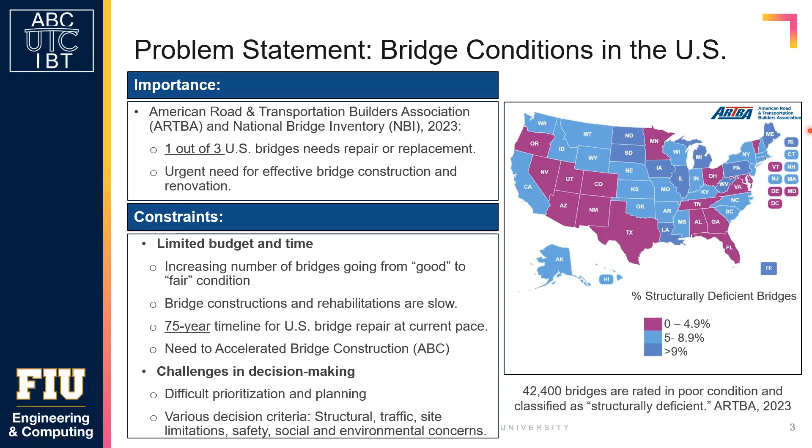So the answer is we really need a decision support tool to help our decision makers overcome these challenges. Otherwise, with this pace and with the budget limitations we have, it takes a lot of time for the country—maybe 75 years—depending on the current number of bridges that need rehabilitation or replacement.

Talking about accelerated bridge construction, we're really talking about multiple aspects. It's not just about reducing the construction time or the project time. It's actually about using innovative planning, design, materials, and construction methods to construct bridges in less time. These are the benefits recognized by the Federal Highway Administration, FHWA—safety, quality, longevity of our projects, and even social and environmental aspects.

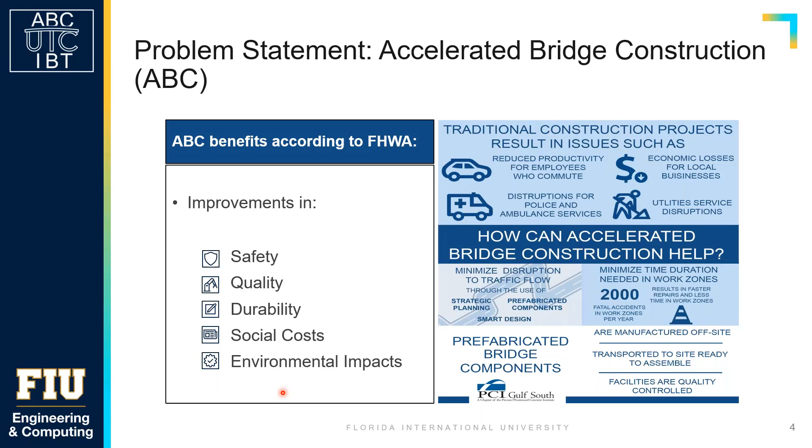And what we are doing is really trying to incorporate as many of these aspects as possible into the decision making for our projects. Currently, state departments of transportation across the country use different approaches for decision making about the suitability of adopting ABC methods in bridge projects.

These approaches vary in a range, from very simple approaches including questionnaires, flowcharts, and simple tools, going all the way to more rigorous and time-consuming methods, including the decision-making software tool by the FHWA that works based on the AHP, or analytical hierarchy process, method.

So different state DOTs have their own procedures. Some are using one-step methods, two-step methods, or three-step methods to come up with a planning method—a decision-making method for identifying the bridges that are appropriate to use with ABC methods.

And here's a link if you want the FHWA tool, which was developed in 2012 through a collaboration with some other state DOTs.

So we did a review of the existing tools, trying to see the benefits, the pros and cons of each tool. We finally ended up going with the Connecticut DOT tool, because Connecticut DOT uses a middle-ground approach—a one-step method, and it's actually a spreadsheet-based tool, an Excel file that decision makers in the state can use to determine the suitability of a project for using accelerated bridge construction methods.

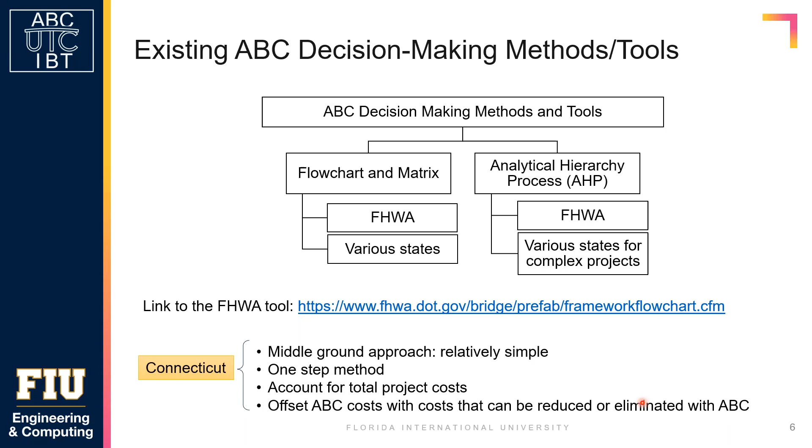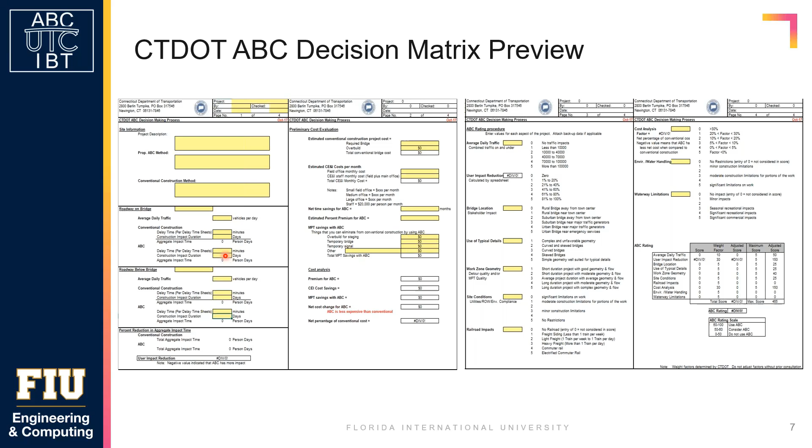This is a quick screenshot of the CTDOT ABC decision matrix. That's again a spreadsheet, an Excel file, and the user needs to provide input values for the highlighted cells, as you see here. And this is basically how this tool works.

So by using the Connecticut DOT tool, we are looking at two alternatives: number one, use ABC; number two, do not use ABC. So we're basically selecting between the ABC and no-ABC options.

Connecticut DOT uses 10 criteria for this decision making. The range of criteria includes cost, with the highest importance or weight factor, traffic conditions, and user impact reduction—that's the time the user or driver spends because of that project. Then there's a wide range of criteria related to the location of the project, the design of the project, site conditions, and environmental factors, including the existence of water work in the project.

CTDOT uses predetermined or fixed weight factors showing the relative importance of these 10 criteria. As you see here, user impact reduction and cost are the most important factors. Finally, the tool calculates a final score for each project, called the final ABC rating score, a number between 0 and 100.

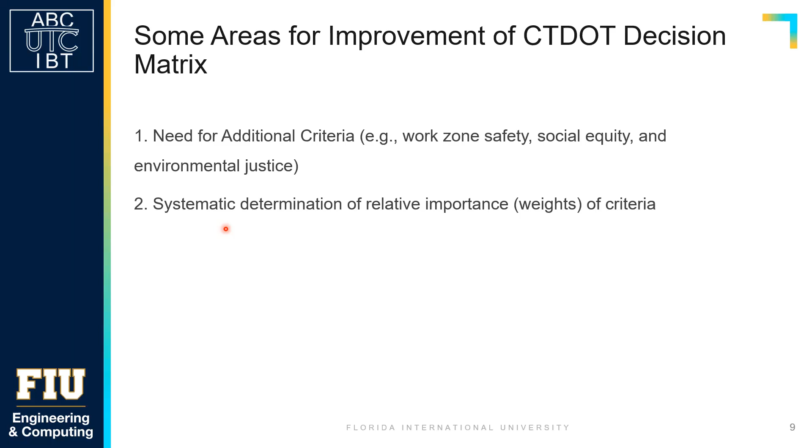So with that, the objectives of this project are basically to incorporate these new aspects into the decision-making tool. We are quantifying ABC benefits for work zone safety and incorporating that into the tool. We are incorporating social equity and environmental justice aspects into the tool, and incorporating a systematic method for determining the relative importance or weights of criteria in the tool.

With these improvements, we're expecting the tool to still be simple, because that's an important factor here. We want the tool to be used by the end users, by state DOTs. The tool is systematic, meaning it's adjustable to different projects.

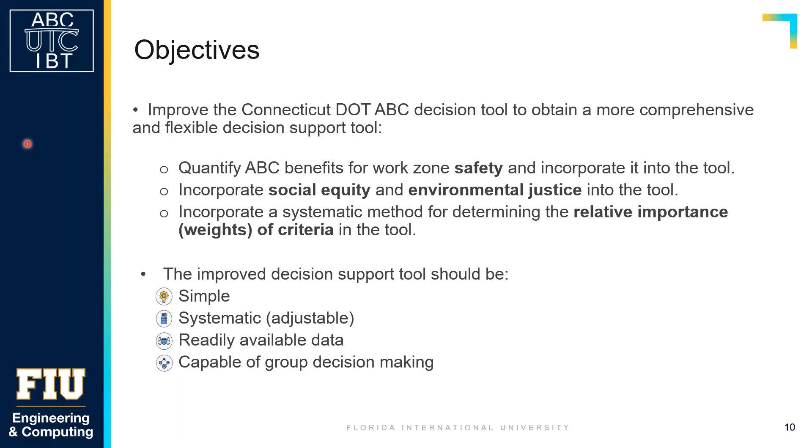Another very important factor is that the tool works based on readily available data, meaning any state DOT in the country should be able to use this tool. And finally, because of having that systematic method for determining weights, the tool is capable of group decision making, which is another important aspect of the new tool.

So let's quickly talk about the relationship between ABC, accelerated bridge construction, and work zone safety, and why safety is important, and why increasing safety is a benefit from ABC. Bridge construction projects are time consuming, and they include a lot of works on the site that affect the construction process and traffic, with a lot of detours and lane closures.

There is data from the National Highway Traffic Safety Administration Fatality Analysis Reporting System that shows work zone fatalities and injuries are really increasing. We see the increasing trend from 2012 to 2021, with a 55% increase, for example, for work zone fatalities.

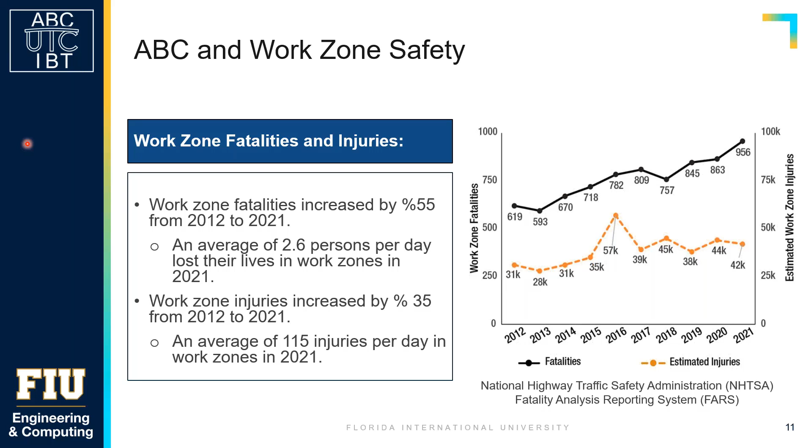And that shows that if we're able to reduce the construction time, it's not just reducing the construction time, it's actually improving safety in the project, or reducing the risk of these fatalities, or risk of having crashes in our work zones.

Now the relationship between ABC and social equity. It might be a question to you how accelerated bridge construction might be related to social equity. To answer that, we first need to understand what social equity means in the context of urban infrastructure planning. The answer is it's providing equal resources and opportunities by infrastructure systems for all urban communities, including ethnic minorities, low-income communities, and sensitive groups including the elderly and the younger generation. So the way ABC can provide benefit here is different.

As an example, you can think about the role of ABC in reducing interruptions in accessing hospitals for communities with sensitive ages, with people with sensitive ages. Sensitive ages are usually defined as people younger than 5 or older than 65. A lot of times these groups need to access hospitals more than other age groups in the community, and by having accelerated bridge construction methods, we are providing less interruption in people's access.

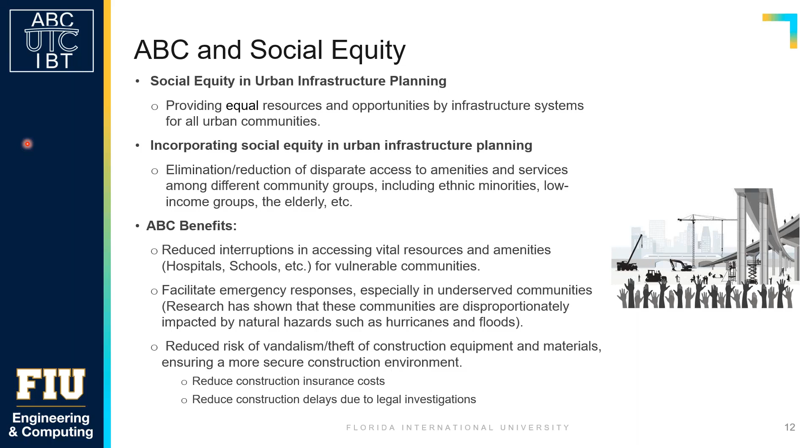There are other benefits of ABC, including reducing the risk of vandalism and theft in construction projects, which can provide reduced construction insurance costs, and also reduce construction delays due to legal investigations.

When we think about environmental justice, we need a definition. In this context, environmental justice means providing fair treatment and involvement of all people regarding environmental policies. For an urban infrastructure project, including bridge construction projects, that's providing the same degree of protection from environmental and health hazards to everyone.

In our specific case, that includes our construction crew and also the people who live close to our work zones. We know that environmental factors such as extreme heat or poor air quality are threats to human health, to our workers, and to our urban communities adjacent to the project. So by reducing construction time, we are actually improving these aspects of environmental justice.

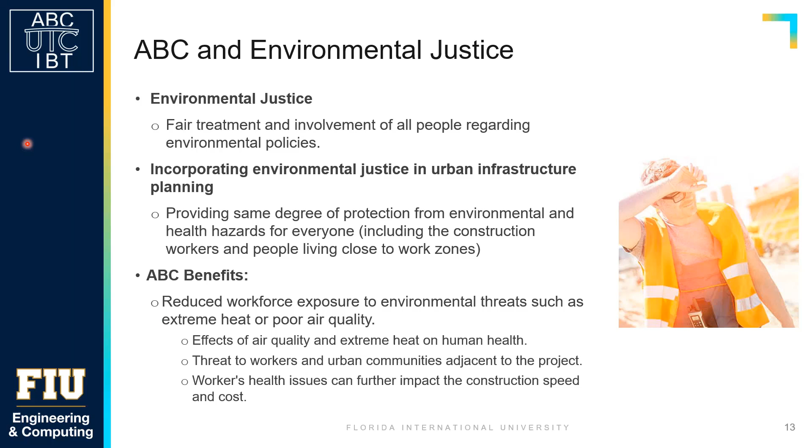Recently, we conducted a project under the ABC UTC, and this is a recently published paper. We tried to develop a framework for incorporating social equity and environmental justice into bridge construction planning and prioritization. That's a very comprehensive work. For social factors in that project, we looked at 6 different data sets, including income, population densities, average commute time, and stuff like that, as you see on this screen.

But in this project, this new tool is actually building on that recent study for social equity and environmental justice. However, we understand that this new tool should be simple and practical, so we didn't use all 6 factors for social equity and the 2 factors for environmental justice. We only use 2 here: income and population density. We'll be talking about that shortly in this presentation.

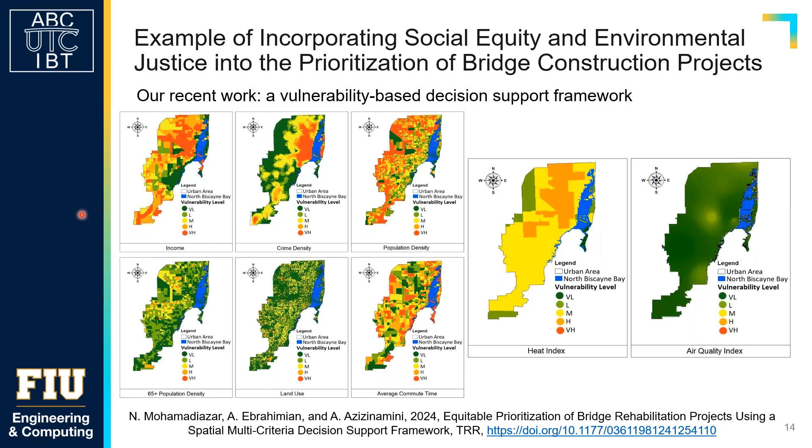So getting to the methodology for developing this new tool, it's actually an improvement to the existing Connecticut DOT decision matrix, and the improvements are in 2 ways. Number 1, we are adding a new decision criteria: safety is being incorporated into the tool. Also, social equity and environmental justice, or SEEJ, is being incorporated as a new index, both safety and social equity. To the best of our knowledge, this is the first time incorporation of these factors into ABC decision making.

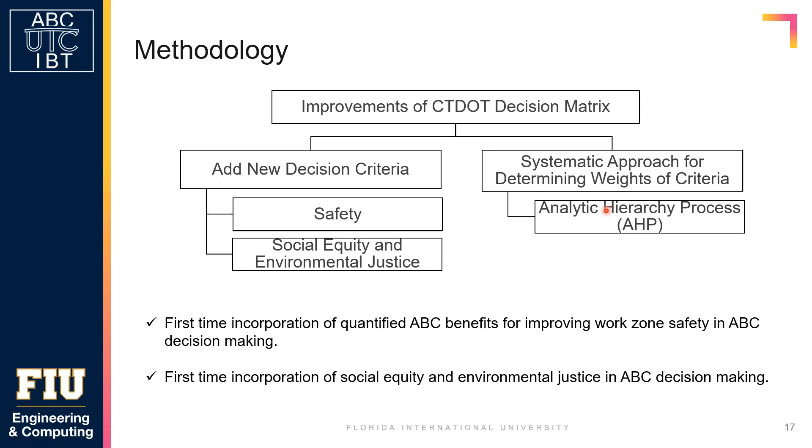On the other hand, we are incorporating a systematic method as an option. We are still keeping the option of using predetermined weight factors, but we are adding this new capability to the tool to be used as an option.

So the new tool, we try to keep it as similar as possible to the existing Connecticut DOT tool, meaning that it's still a spreadsheet, an Excel file. You can just open it similar to any other Excel file. When you open the tool, this is the first page you see. You see multiple tabs here. The user needs to go one by one into each of these tabs and provide some input information. There's a link here that you can use to access the tool after this presentation.

In the near future, we are providing step-by-step guidelines and training videos for you to be able to use this tool. We have called this a draft. It works fine, but we called it draft because we're really interested in you using the tool and letting us know about your experience or feedback, so we can improve it or address any comments. With that, I'll turn it over to Nasim, and she will provide you with some more details about the tool.

Nasim, it's all yours. Okay, so here I want to start with how we started with safety benefit quantification. As mentioned, ABC minimizes the work zone safety crash cost by reducing the number of days that the work zone is active. So you'll notice that ABC typically might have some higher upfront costs compared to traditional methods of construction. However, introducing this safety quantification benefit can offset these initial expenses in some cases.

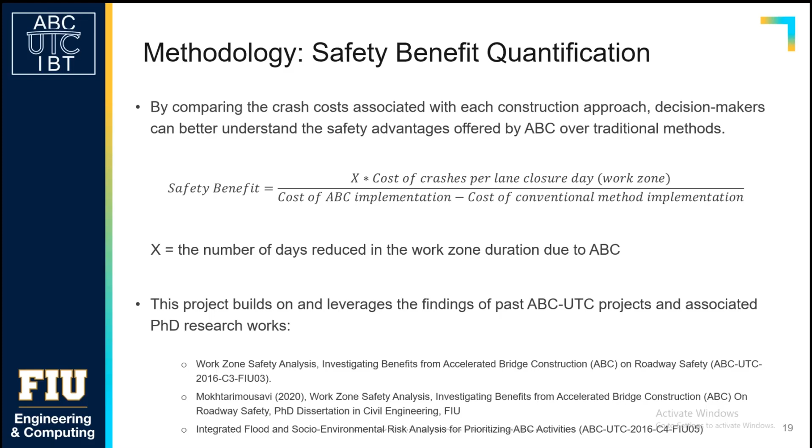To design the safety benefit tab in this tool, first we conducted a limited survey to gather information on crash data from different state DOTs, to understand how different state DOTs handle their crash data. The result showed that each state DOT, more or less, establishes and updates their crash data for internal uses. However, there is not consistency in their safety crash data reports.

For example, I can mention Arizona DOT or Kansas DOT, which have open access available crash data. On the other hand, Alabama DOT doesn't provide geospatial crash data records online. Or, for example, Illinois DOT just gives limited access to this crash data.

Additionally, state DOTs don't follow the same crash cost analysis and report methodology. For instance, Kansas DOT has the statewide crash cost, while Arizona and Montana DOT use the national crash unit cost. So to sum up, these findings helped us design and adjust the safety quantification tab in the tool to make it more applicable to every state DOT nationwide.

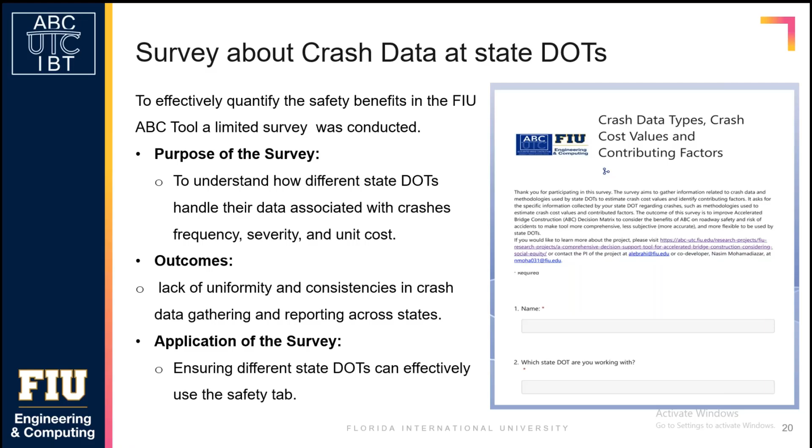From what you are seeing here in this flowchart, there are two main data resources included for safety calculation in this tool. One is from state data records, and the other is from national readily available data records. The monetary value of crashes at the bridge's location will be calculated either from national databases or state-specified databases, depending on the user's preferences and their availability.

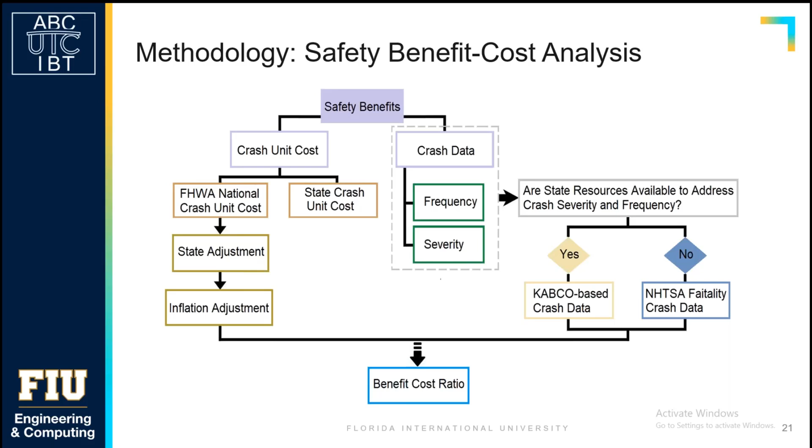From this methodology, the safety tab in the tool includes four standalone tables. The user just needs to complete one of the tables, so it's not mandatory to fill all of them. Based on data availability, the user will decide which data table they need to use for safety benefit calculation.

There is a matrix included in the tool to help users choose the appropriate table number. The crash frequency and unit cost intersect, and that table cell will define which table number should be used. For example, if crash frequency data is coming from national data resources, and crash unit cost is also coming from national data resources, table number 2 will be the appropriate table for the safety benefit calculation. We also provided useful data links for data inquiry for this tab and calculation.

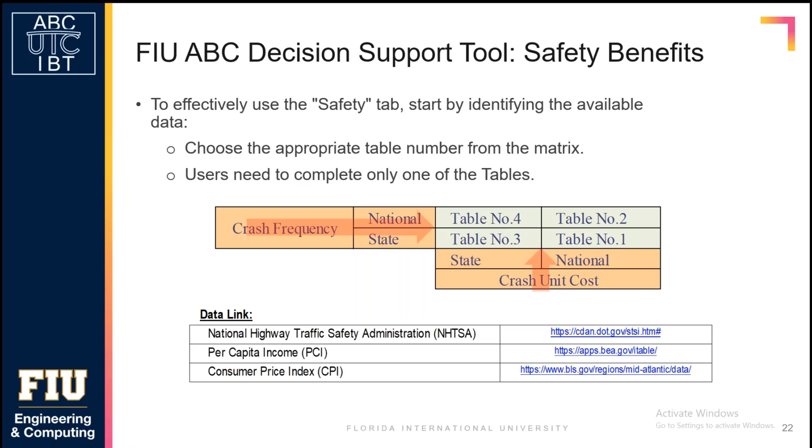In addition to safety, we also introduced social equity consideration to the tool. Potentially there are many criteria that could be considered here in terms of social equity. However, to keep the tool simple, we just consider population density and income.

This direct and indirect cost also affects low-income communities because they will have limited access to health services, education, or jobs, or any other services for the community when the construction zone and work zone is active.

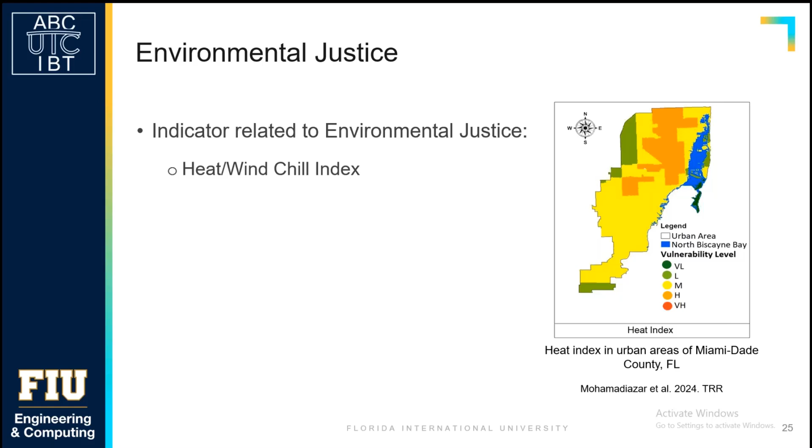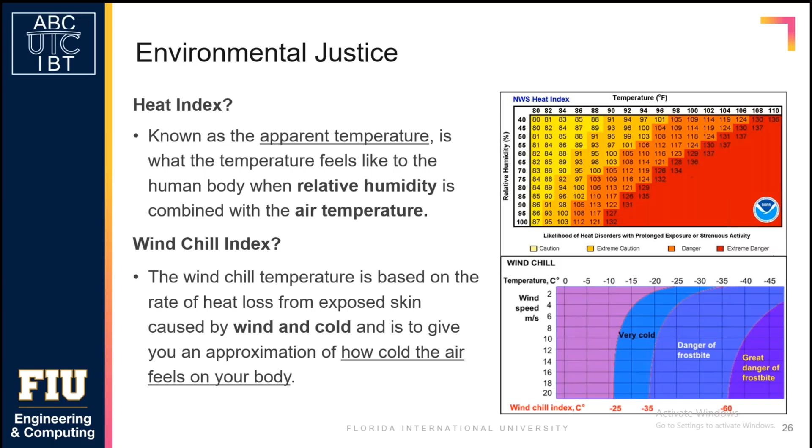Just to go over quickly, heat index measures how it feels on the human body when there is humidity along with air temperature. High heat index values can pose different health risks, such as heat stroke or dehydration, especially for outdoor workers. The wind chill index tells us how cold it feels when combined with the effect of wind. You can see here different classifications of heat index and chill index values, which we then calculated in the tool.

To quantify the social equity and environmental justice consideration into the tool, we introduced the SEEJ index, which is the weighted average of decision-making factors in each of these categories: population density, income score, heat or chill index, which then using the weighted average method gives us the SEEJ index. A higher SEEJ score indicates greater concern, meaning the area requires more attention in terms of infrastructure planning. Here, ABC can be more helpful with those vulnerable areas.

As mentioned, we also had another step in this FIU-ABC decision support tool, which is the last step to determine the relative weights or importance of the criteria. We included two different methods: one is predetermined weight, the other is AHP, or analytical hierarchy process weighting, and it's completely up to the user which way they want to use and apply in their decision making.

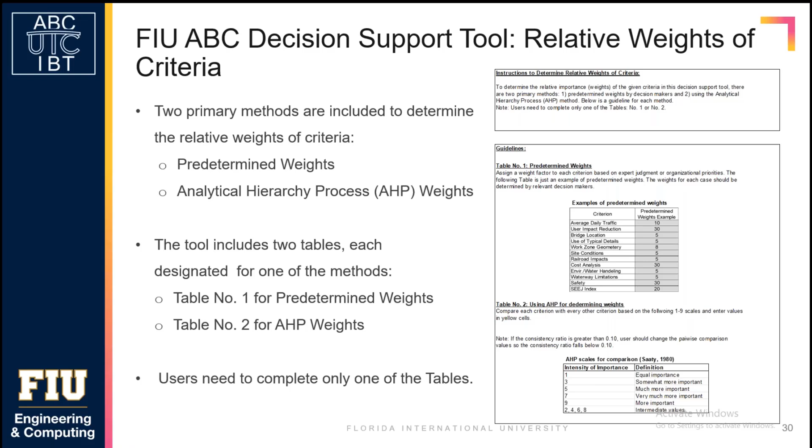If you want to start with predetermined weights, it's straightforward and simple enough. The user just needs to enter the predetermined weights they have from their organization or expert judgment. We also included example predetermined weights for users in case they just want to use those.

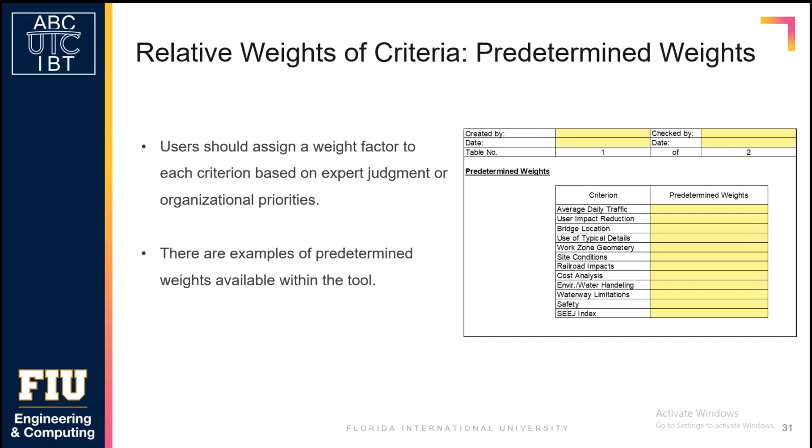The analytical hierarchy process is a very well-known approach that has been applied a lot in infrastructure planning and decision making. This is even more useful when criteria weights need to be adjusted or specified for a particular context, or when multiple stakeholders are involved in the project. In this method, the user just needs to fill the yellow cells using a numerical scale from 1 to 9 based on a pairwise comparison. I don't want to explain the details here, but you're welcome to check the handouts later, and also the video we'll provide on the website for more details on how to apply the AHP method for weighting.

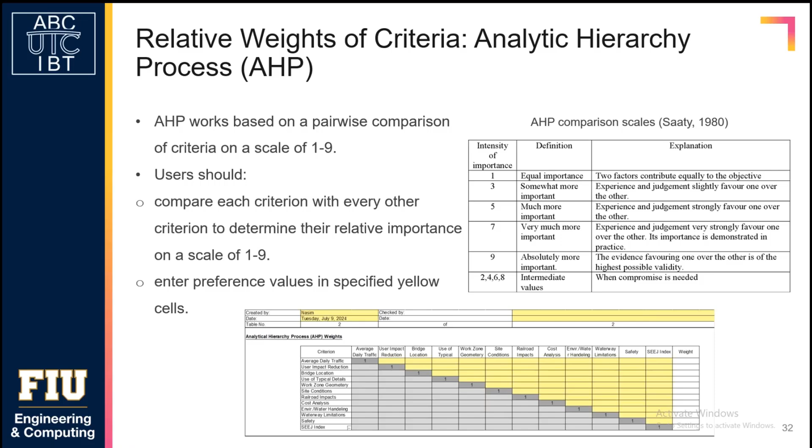So now I'm finished explaining the structure of the tool, and I want to go ahead and introduce the practical applicability of this tool using a case study.

This case study uses the exact same input data that was provided before by Connecticut DOT in the in-depth web training, module 5, which we also provided a link for if you want to look at the presentation itself. Again, we are using the same input data for our case study, so at the end we can compare the results with the Connecticut DOT tool.

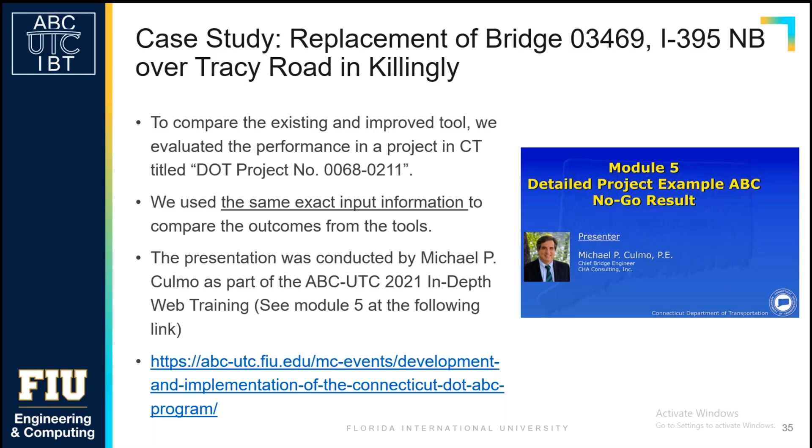This project is located in the town of Killingly in Eastern Connecticut, and it involves Interstate I-395 over Tracy Road, in a very rural section of Connecticut. With a closer view, you can see that this bridge has 3 different lanes, which I'll explain later.

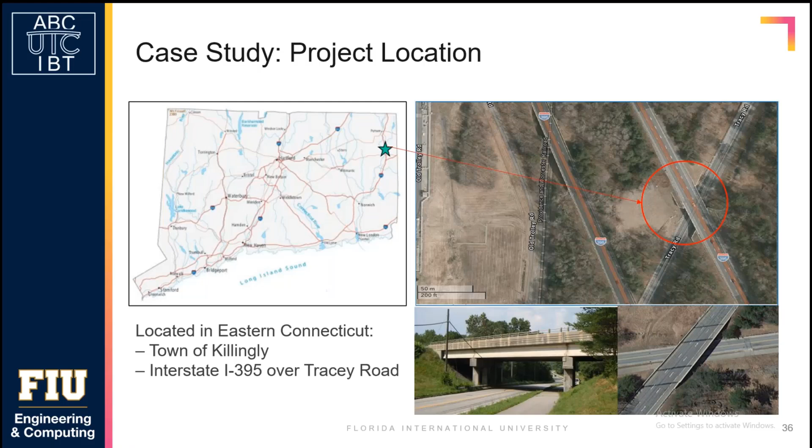In this case study, there were 2 different proposed replacement methods: one was conventional, and the other was accelerated bridge construction. One thing to consider is that this project was only proposed for replacement of the northbound structure of the bridge. This bridge is a 3-span concrete structure with fairly standard geometry. However, the bridge joints were problematic due to years of leaking, which led to significant deterioration of many beam ends, leading to the decision to replace the bridge.

For the non-ABC construction method, they proposed a staged construction, maintaining 2 lanes in stage 1 and just 1 lane in the second stage. The overall construction time was estimated at 18 months.

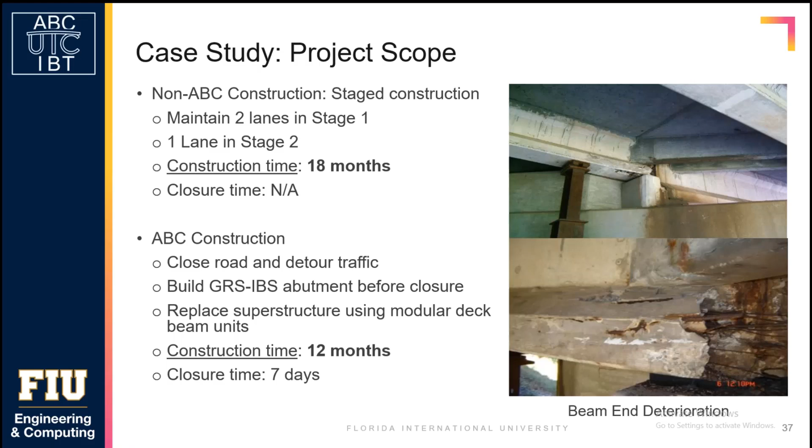On the other hand, with accelerated bridge construction, there was a 7-day closure time proposed, so they could go ahead and build the bridge, with an estimated total time of 12 months. The idea was to do the majority of the work before the closure, to limit the construction time and activity of the work zone at the bridge location.

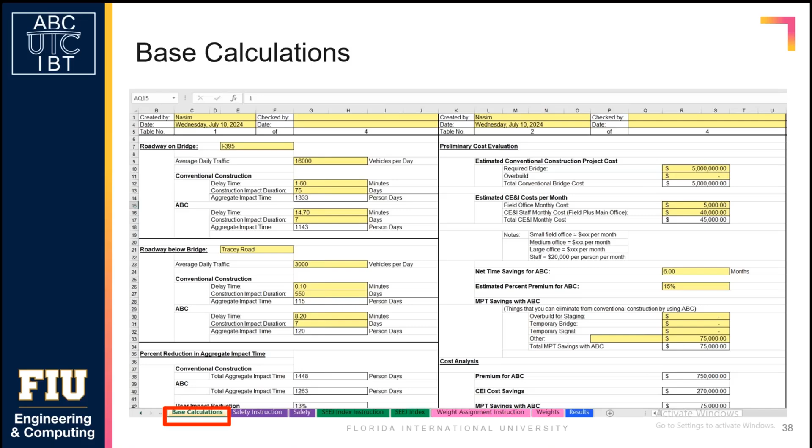Here you can see a snapshot of the base calculation tab, which is the very first tab of the tool, after the introduction. This is exactly the same as what the CTDOT decision matrix has. This tab includes 4 different standalone tables, each calculating 10 different criteria that the CTDOT matrix has. We'll look closer at the definition of those criteria.

One important criterion in this tool is user impact reduction, which basically accounts for additional delays due to high traffic volumes because of construction, and can also be due to stop signs or congestion. To calculate user impact, a delay time is needed, and calculating delay time usually requires complicated methods or simulations. But the good thing about the CTDOT decision-making matrix is that it uses a congestion factor, and the tool itself, based on the access limitation time, will calculate the delay time, making it really user-friendly and straightforward.

For this case study, we have one road over the bridge and another under the bridge. As mentioned, the first stage was proposed to have no delay, while in the second stage we had one reduced lane.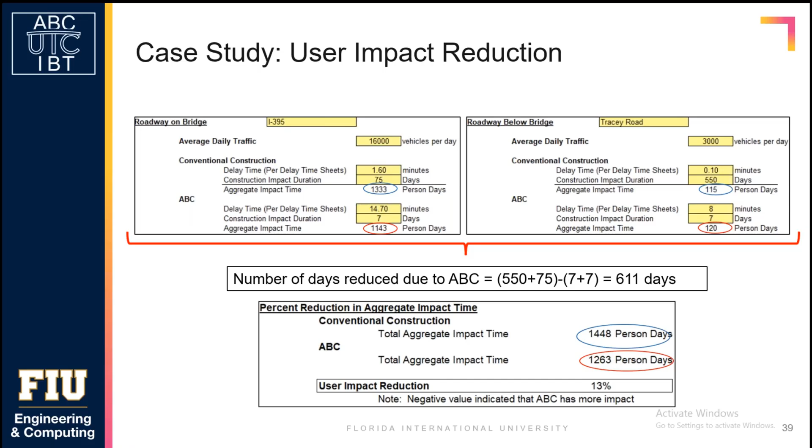And in the reduced lane, we had about 75 days estimated. Therefore, the average daily time per vehicle is calculated at 1.6 minutes for the first option. Using the ABC method, we have just 1 detour option for that 7 day closure time, which gives us an average delay time of 14.7 minutes. That at the end gives us the final user reduction for ABC, which is 13%, meaning accelerated bridge construction impacts user time up to 13% less than the conventional method.

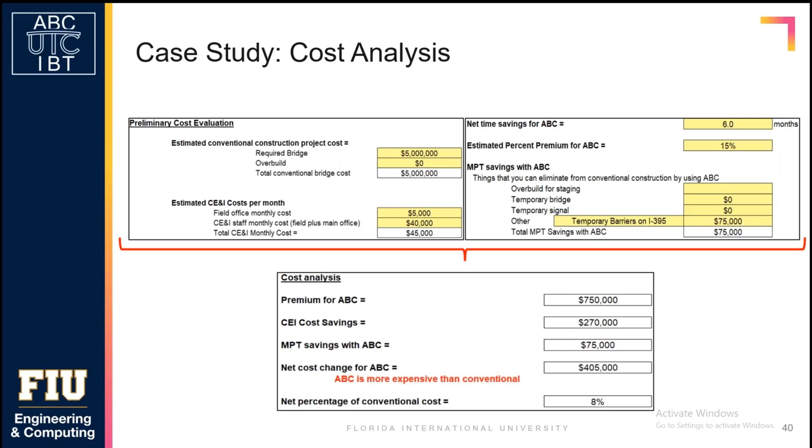Now let's look at the cost here. Going through the calculation, we see an 8% increase in construction cost when we go to ABC, which means ABC is 8% more expensive in this case study. Again, you can go ahead and look at the details with the links we provided. I'm just going ahead fast.

In addition to these two factors explained here, there are 8 more factors included in the CTDOT decision matrix, and each of them gets a score. For example, one is related to the bridge location, how close it is to a hotspot like a hospital, or a measure of design complexity, work zone geometry, and site conditions, how it can limit construction for ABC. And if we have any waterway limitations, any waterways beneath the structure that might affect the users.

So after giving any score based on the project construction, finally, based on the CTDOT decision matrix, we ended up with an ABC rating of 44, which puts us into the 'don't use ABC' category for this project.

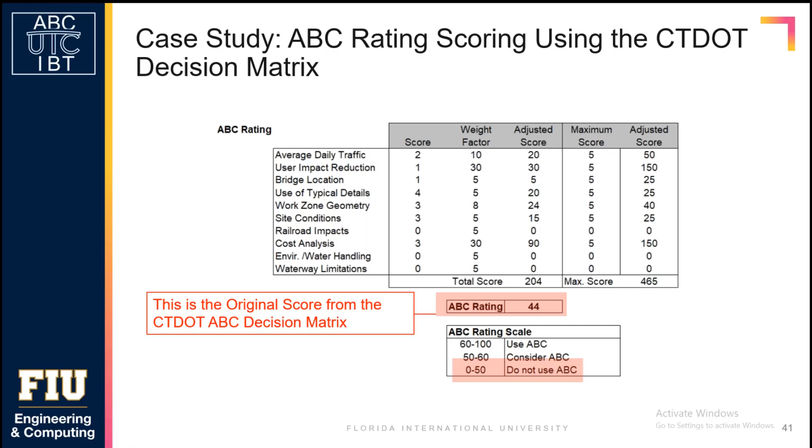So when we go forward in the tab, we see the safety tab, which comes with safety instructions before it, so users can use the safety instructions and guidelines for data inquiry and entry into the tool. As you can see, the safety tab includes 4 tables, but users just need to complete one of them based on the crash data availability they have. This matrix will help them, as I explained before.

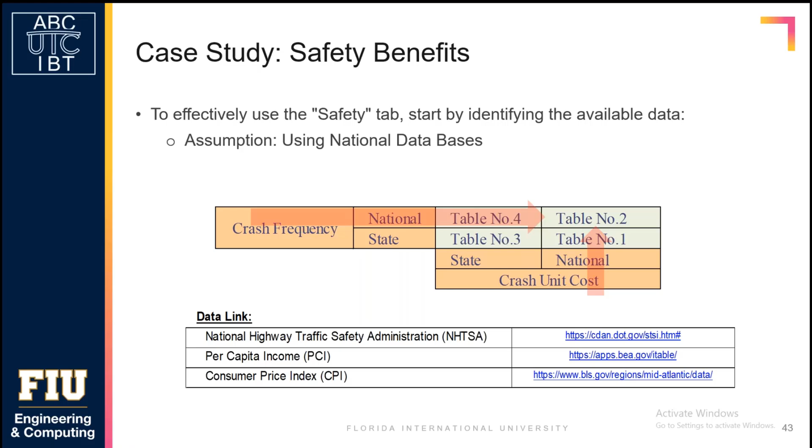For this case study, I assume we have data from both national databases for crash frequency and crash unit cost, so we ended up using table number 2. We also have access to the data link we need for data entry through the tool. So you see the snapshot of the safety tab here. We have table number 2, and users just need to complete the yellow cells. The only thing they need to look at here is what kind of data they need.

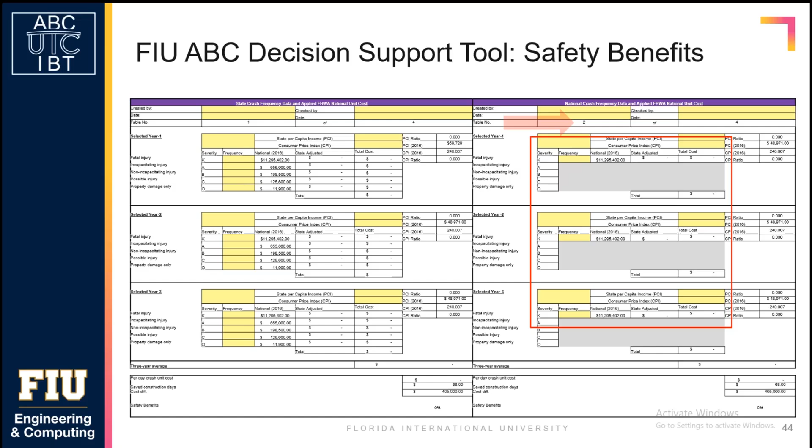The user will find out that first they need to put in the calculation year they want to do the calculation for, and then the crash frequency data is needed. After putting in the crash frequency data, the tool will automatically apply the national crash unit cost. However, because this is based on 2016 national unit cost, adjustments are needed for inflation, and state adjustments are also necessary. To do that, we need 2 more data points: per capita income data and the consumer price index.

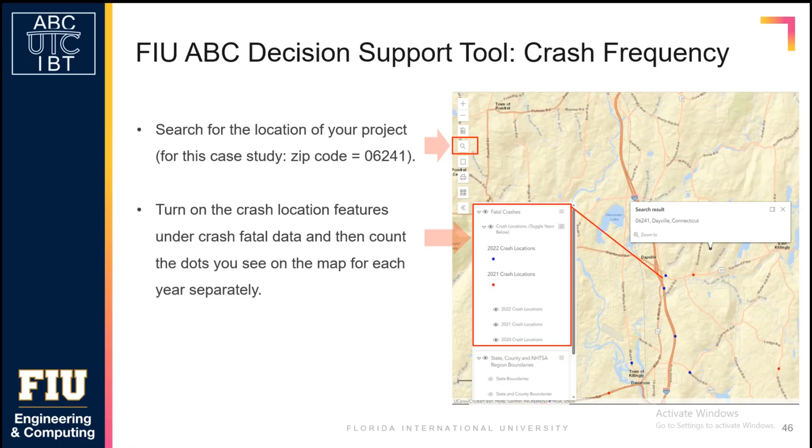I'll explain the crash frequency data inquiry from the national crash databases quickly. We have the link provided in the tool. Users click on the link and navigate to the website. There, they click on the crash map, and then just by clicking on the location of the bridge, or by putting in the zip code or address, they can find the bridge location. Then they count the fatal crash data and enter it into the spreadsheet we provided, for 3 different years they want to do the calculation for. We did the calculation for our case study for 2020, 2021, and 2022.

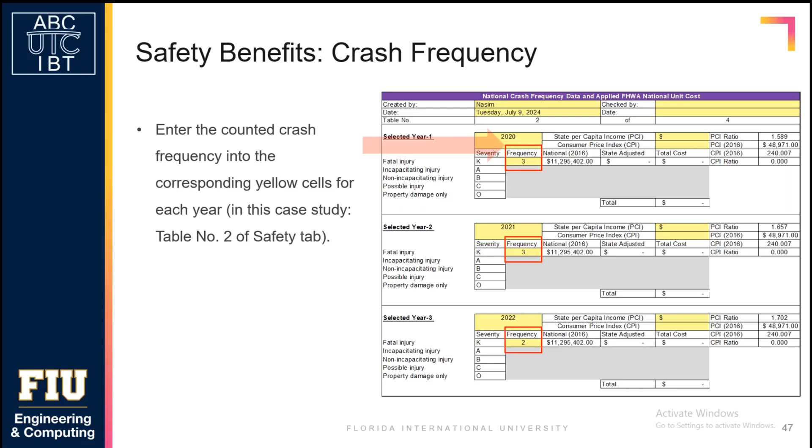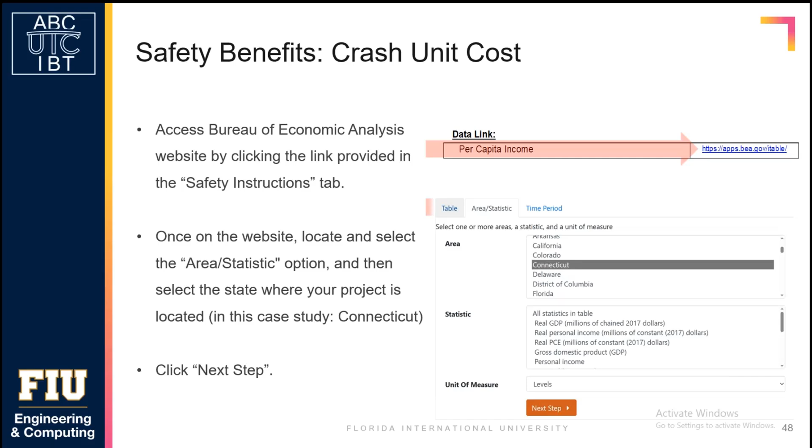As you can see, the frequency data is provided here. Now we need another piece of data: per capita income, for adjustment to the state. To do that, again, the link is provided in the tool. By clicking on the link, the user navigates to the website. Based on the state and area, they choose the state, and then the time frame is chosen. Then they click next, go to the time period, and at the end read the per capita income for the 3 different years they have in the tool for the calculation.

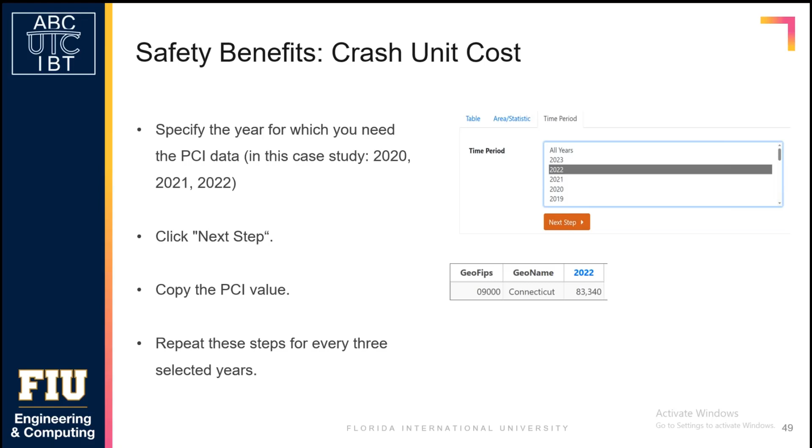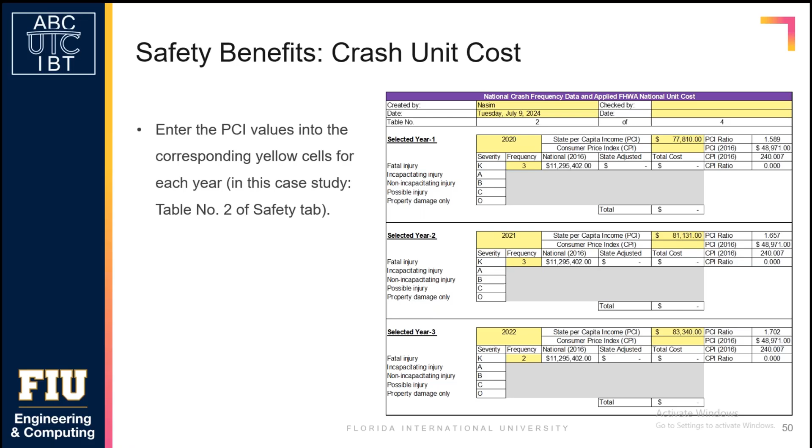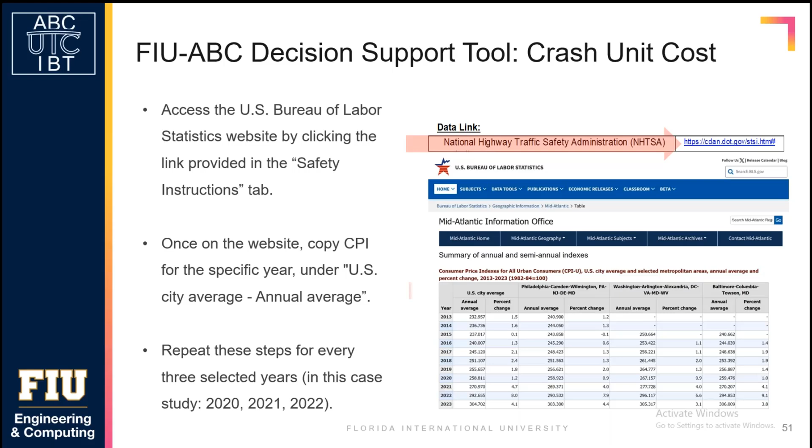So the user will enter the per capita income into the tool, and then the next information we need here for the inflation adjustment is consumer price index. To do that, again, the link is provided. They will just go ahead and do the same thing, clicking and then reading the data from the website, and put it into the tool.

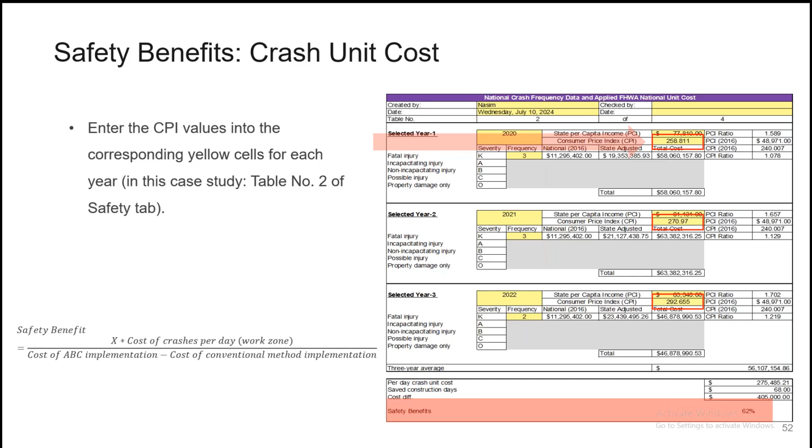And then at the end, for this specific case study, after the calculation, the safety benefits quantification gives us 62% safety benefits, which shows the percentage of total savings of total ABC implementation costs. So even though ABC is costly in this project, for total ABC cost, there is 62% return in terms of reduced crash costs because of accelerated bridge construction application in the project.

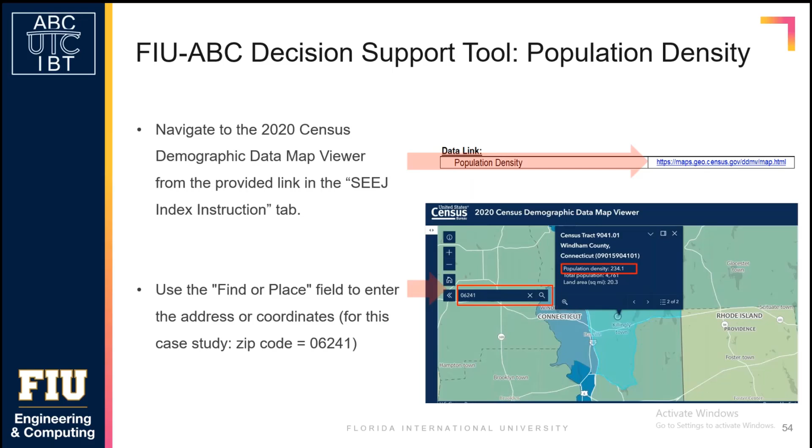And then we want to introduce the SEEJ index to the calculation. We have the introduction to help the user with the guideline, and provided the links for data inquiry and data entry. One of the data we needed is population density. They will just, again, click on the link. It's straightforward, looking for the bridge location and copying, pasting that into the tool. And then the tool will automatically give a category from 1 to 5, and the higher the number is, the higher the vulnerability for that project location.

For per capita income, again, using the readily available data link provided, the user will get the information for the per capita income and put it into the tool, and then that will give us another category number automatically, and the social equity factor will be calculated here automatically for the project.

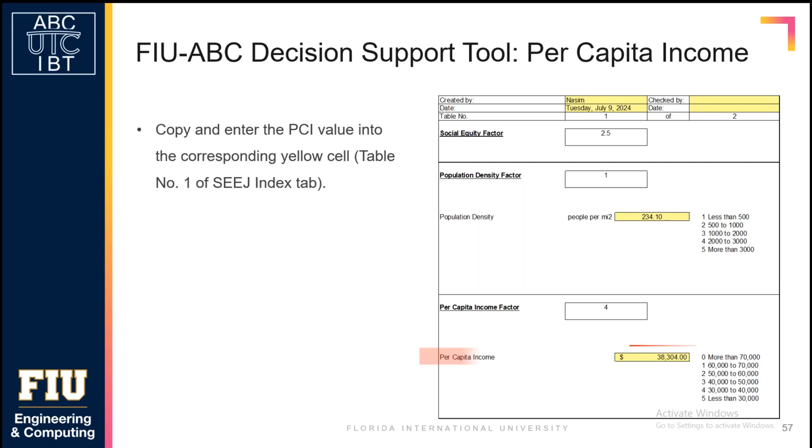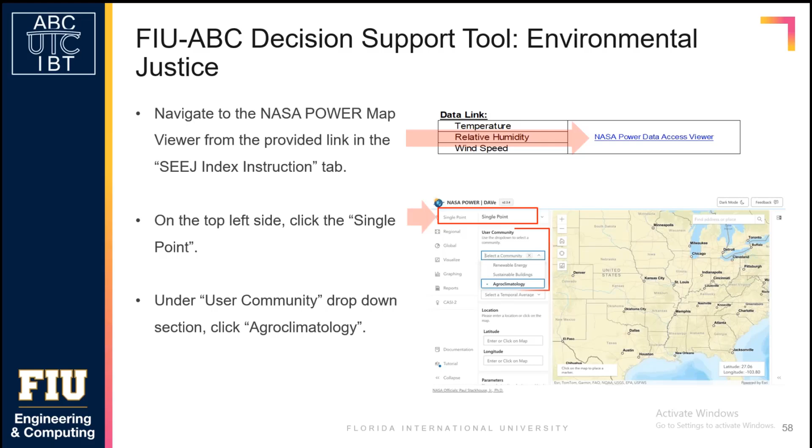Then we go for the environmental justice calculations. Three different data are needed here: temperature, relative humidity, and wind speed. All of them will be captured from the NASA website, and that will be easy, again, like the other ones, clicking straightforward. It's readily available data. So the detailed information is provided in the guideline and the video that will be provided later for the tool.

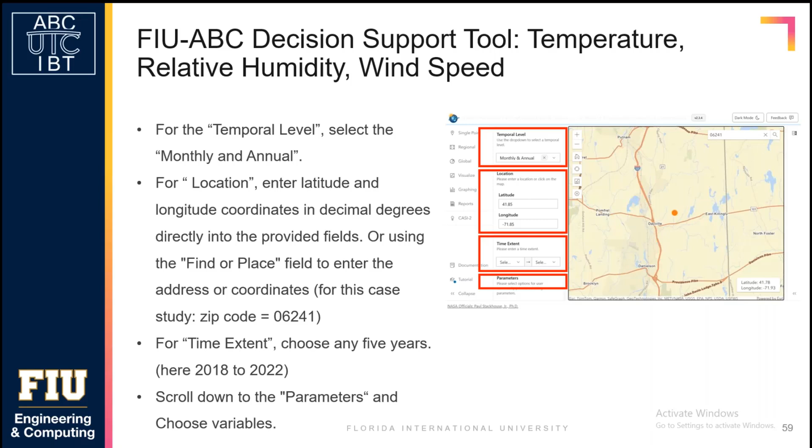I'm just going ahead explaining quickly. So after choosing and selecting the data that we wanted from the website, the user will download the information and they will come up with a CSV file from the website that gives them the information we want. And this Excel file has annual average information for each of the data that we want.

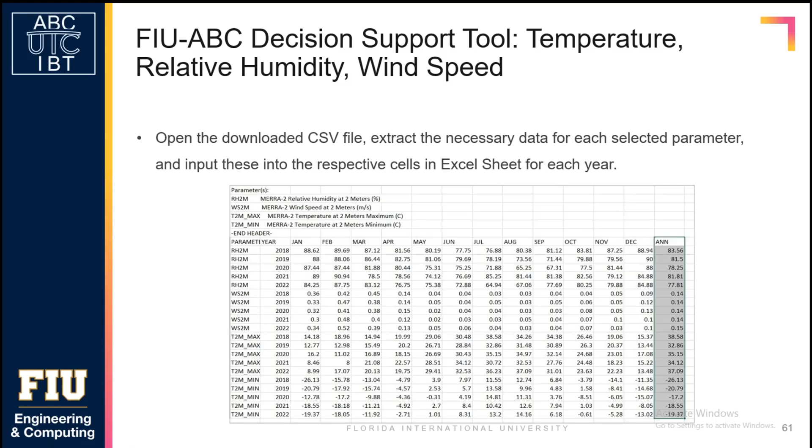For example, for the relative humidity, we have data for 5 different years. So just copying and pasting this information into the tool, pretty straightforward and simple, and then the tool will calculate based on the calculation that will decide whether the heat index or chill index is applicable to the location, and then also give another score from 1 to 5 - the higher the number, the more vulnerable.

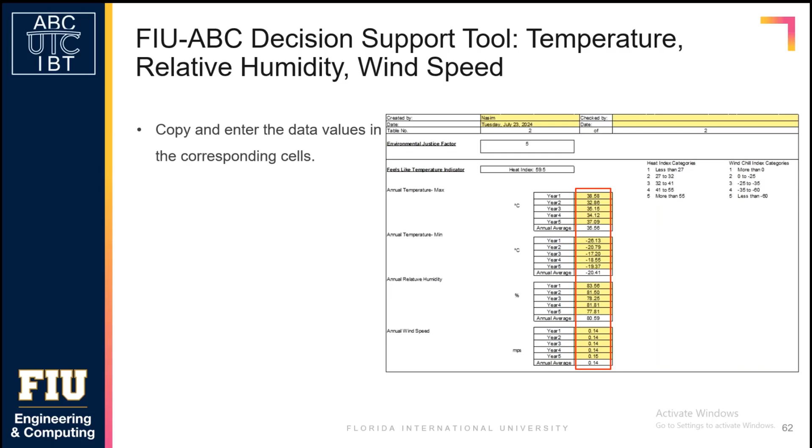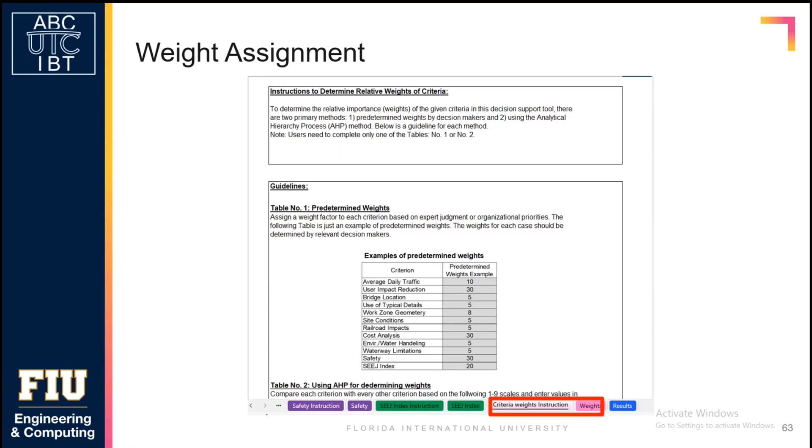So another step here, which is the last step, is the weight assignment. And I explained it already for you, that is predetermined or AHP. In this case study, we use the predetermined weights, and we just copy paste the predetermined weight examples that we include into the tool. And then you can see here two tables that we have for each of these methods. These yellow cells are completed with numbers by the user.

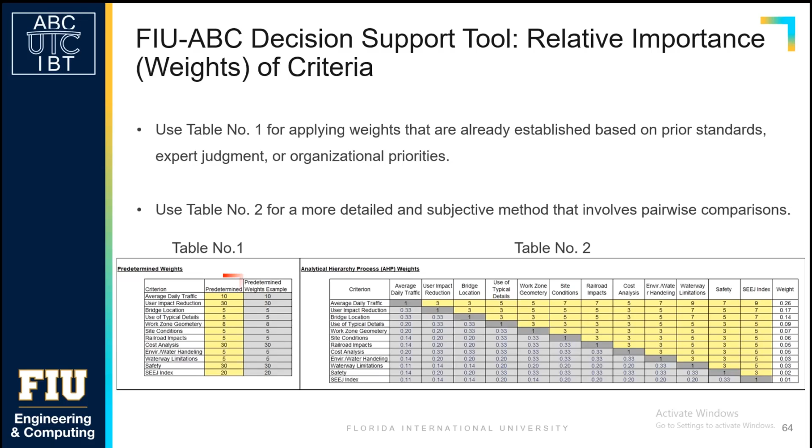So at the end, with using the predetermined weights for this case study, we ended up with 3 different results, and that shows how integrating safety and SEEJ can affect the decision making. I want to go back to Dr. Brahimian for further clarification and explanation on this.

Okay, all right. Thanks, Nasim. Can you hear me? Yes. Okay, so well, I'll try to wrap up the presentation.

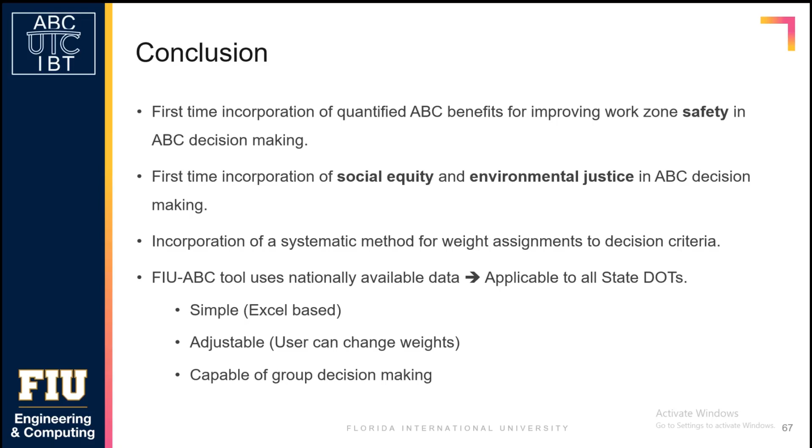The tool is still simple, it's Excel based, and it's adjustable, meaning that we can change the weights here. We can also in the future add or delete decision criteria and provide group decision-making capability as well.

So, this was our first try of including safety, social equity, and environmental justice here, but we are really expecting the end users of the tool, probably state DOTs across the country, to use it in real applications and provide us with feedback. Hopefully we are able to hear back from you and see how we can further improve the tool.

The tool can be further improved to provide less qualitative evaluations. One other aspect of improvement could be providing the benefits of ABC for reducing greenhouse gas emissions, contributing to climate change mitigation and adaptation. And last but not least, as you probably noticed, this is a semi-automatic tool.

A lot of the data is available from national databases, but the user needs to go to the national database, click on the link, copy the data, and paste it here in the tool. But this process can be automated.

So if there's interest from, for example, FHWA or multiple state DOTs, we are happy to put together a new project and provide really an online tool that automates the whole process.

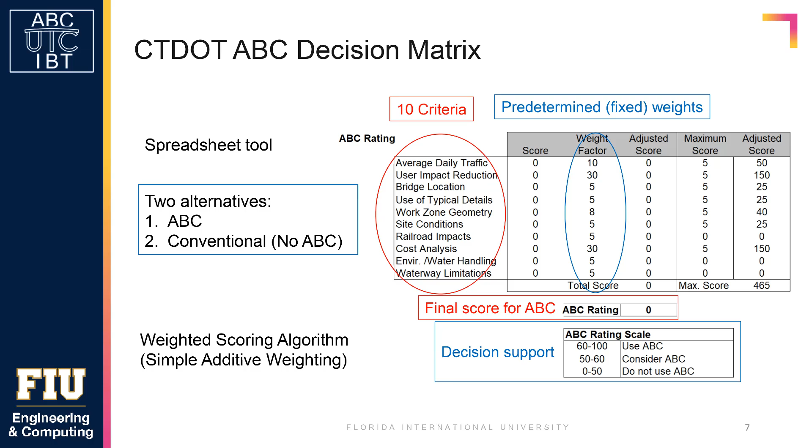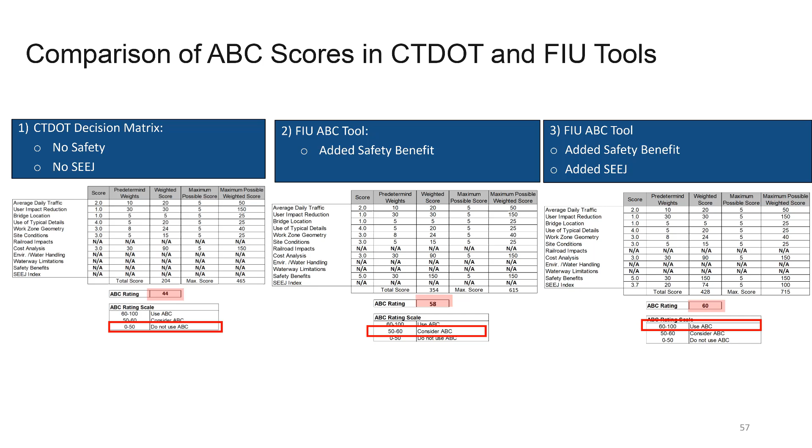I don't know that. All right, now you got a total score. What did you get? You got a score of 44. Now, if that would have been over a roadway and it had just a little bit more, it probably would have gotten up to, might have gotten up to 60. Is that possible?

Oh, actually yes, that's something because with the crash data we introduced to the tool, we used just fatality data. So because the fatality data compared to the other categories of crash type has much higher values, that affected a lot to the project.

Okay, but I'm looking at the waterway limitations. Waterway, that wasn't applied. I know, but if it was 5%, and just suppose you had a limitation of 10, then that would have given you, multiplying it out, would that have pushed it over the 60% or the 50%? Because you're at 44 now. Well, it's possible. Again, the way this is from the original tool, this the waterway limitation.

Yeah, I understand. If you have a waterway that will be impacted by the project, including changing the cross section of the waterway, which is not good for flood considerations, or if you're polluting the waterway, these are bad things. So we want to reduce the impact that the bridge construction projects will have on the waterway. Depending on the situation, how the waterway is going to be impacted, this can get a score of 1 to 5. Here it was not the case, so the score is 0 here.